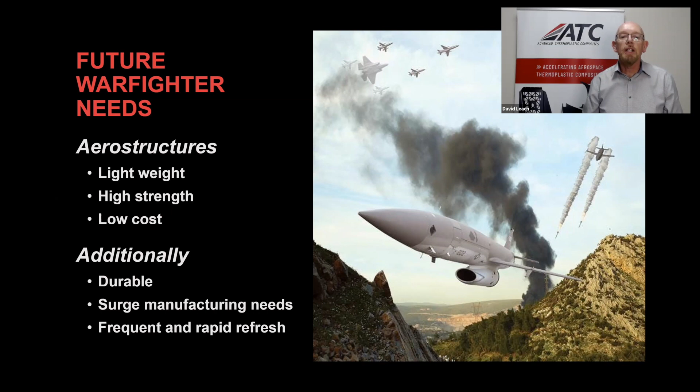We have several opportunities for different materials for these aerostructures, starting with metals, which are very mature, but a high weight, and the detailed machining adds considerable process time, leading to higher cost of the finished parts. Thermoset composites have been the materials of choice for recent generations of military aircraft. They have excellent strength to weight, but have very long fabrication times, resulting in high finished part costs.

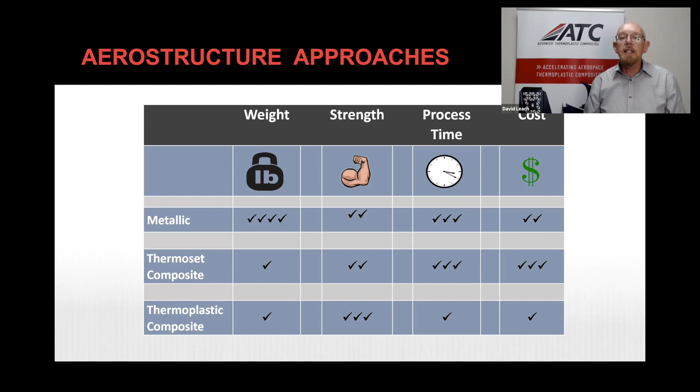In recent years, thermoplastic composites have emerged as structural materials, which have many of the same benefits of thermosets, but can be processed much more quickly, resulting in both high rate manufacturing and much lower finished part cost. In addition, they have other advantages such as high toughness, giving durability.

Now, the needs for these vehicles are not unique to the Air Force. Indeed, this recent survey by the National Institute of Standards and Technology of subject matter experts identified what are the key limiters to the increased adoption of composite materials. Thermoplastics can address many of these, and in particular, the top two of process time reduction and lower finished part cost are direct benefits of using thermoplastic composites.

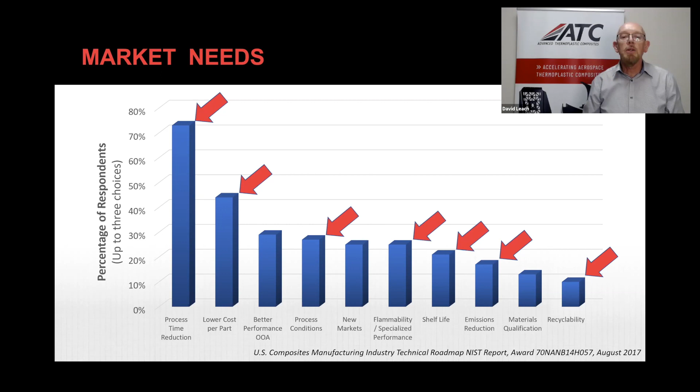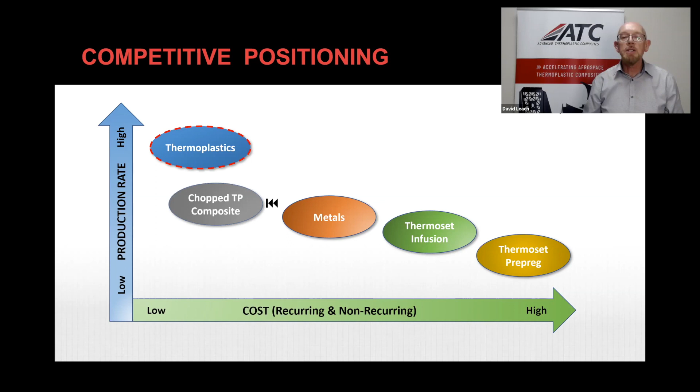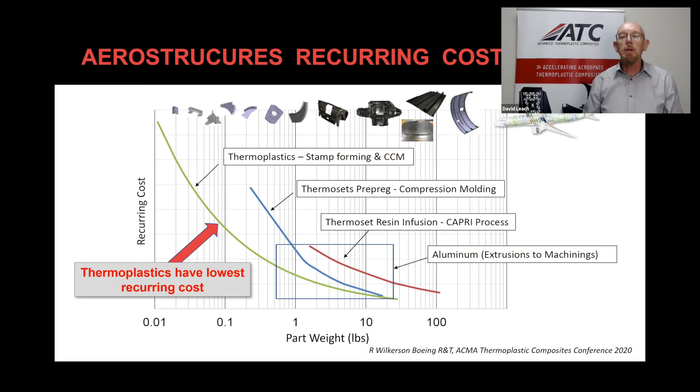If we look at those two attributes in particular of lower finished part cost and high production rate, thermoplastics offer a unique value proposition relative to the other materials we would consider for structures, taking into account the performance differences between those materials. And this isn't just us saying this. This recent chart from Randy Wilkerson, a Boeing Technical Fellow, illustrated the relative part cost of different materials technologies, including thermoplastics, various thermosets, and metals. And as you see from this, thermoplastics have the lowest recurring part cost, particularly for small to medium-sized structures.

Now here at ATC, we already supply many thermoplastic composite parts to commercial aircraft applications, including clips and brackets, through secondary structure parts, such as stiffeners and channels, and to primary structure parts, with very important performance and quality requirements. Some of the common features of these parts, though, are that they are typically small to medium sized, a constant thickness, moderate complexity, and also they're generally used where there's multiple of the same part on a given aircraft to enable higher volume manufacturing and the economies of scale.

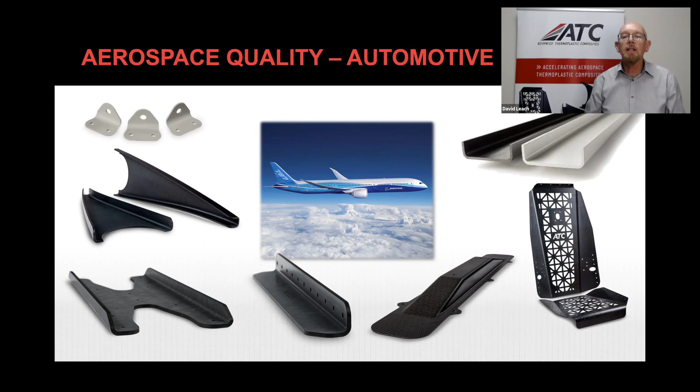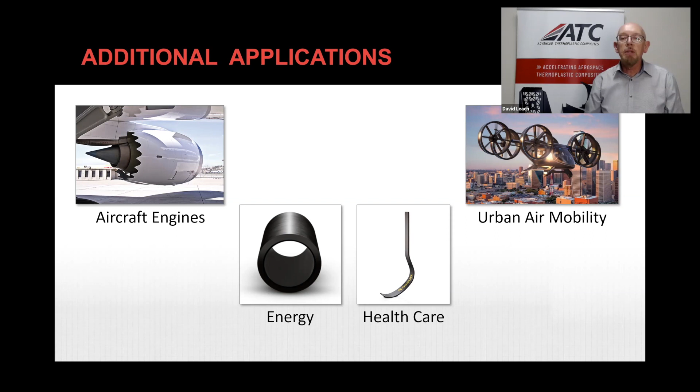Additional applications are emerging because these attributes of performance, weight, and cost are valuable in other markets, including aircraft engines and nacelles, energy, both extraction and renewable energies, healthcare, and also the emerging urban or advanced air mobility applications.

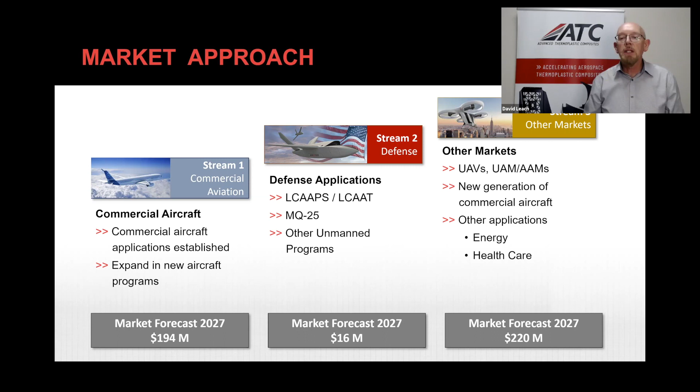We've looked at these different markets, taking into account, first of all, commercial aircraft, where there's an established base of applications, with new applications and new platforms as well, going into defense applications, in particular unmanned vehicles, and through to some of the emerging markets such as the unmanned vehicles, advanced air mobility, energy, and healthcare. We see a serviceable market of $430 million for the thermoplastic aircraft structures in 2027.

The non-recurring costs are mainly due to tooling, and we have a modular tooling approach which would use a common base and interchangeable sleeves to make a family of similar but different geometry parts. This also enables a reduction in recurring costs because it enables quick changeover during manufacturing. The recurring costs can also be reduced through increased understanding of the processes and through the alternate material formats that we discussed.

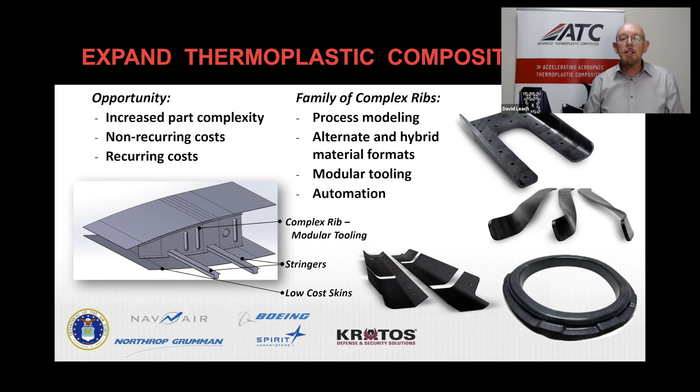Now, we're very confident of being able to move this to production readiness because we've already demonstrated many of these elements in research and development programs at lower manufacturing readiness level. We also have concurrence from the Air Force and key stakeholders in this approach.

So why ATC? Well, we have been in business since 2004, manufacturing high performance aircraft structures. We have a fully integrated facility and we've supplied over 6.5 million parts to aircraft applications in recent years. We're fully approved to all aerospace requirements and we have in-house research and development, modeling and design capabilities. We've been nominated as a Boeing Supplier of the Year twice in recent years for technology developments, and in an independent benchmarking survey, we're rated as one of the top composite fabricators in the world.

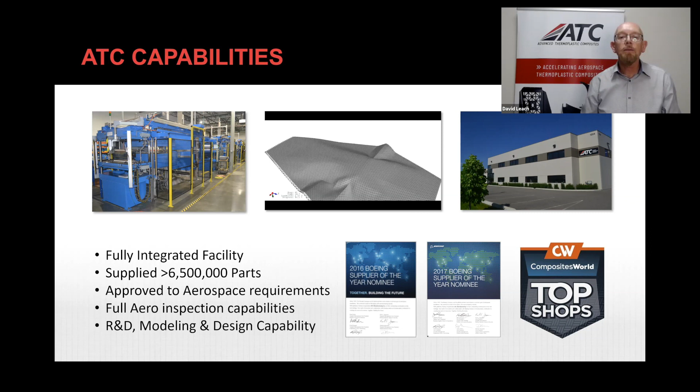Our leadership team has a broad range of experience covering military aircraft, equipment and automation, aircraft product development, and thermoplastic composites and materials. We're supported by a skilled set of scientists and engineers, and we're also a veteran-friendly organization.

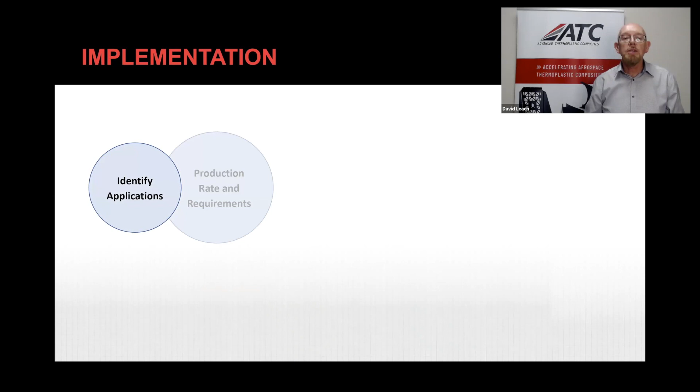So our approach to the implementation of thermoplastic composites is to identify suitable applications with stakeholders, including the Air Force and airframe manufacturers, including full technical and performance requirements, and taking into account production rates and surge manufacturing needs. To integrate this into a design for manufacturing approach to make best use of the thermoplastic composites performance and fabrication, confirming the recurring and non-recurring costs, leading to full production readiness for both Air Force and commercial applications, enabling the next generation of cost-effective aerostructures.